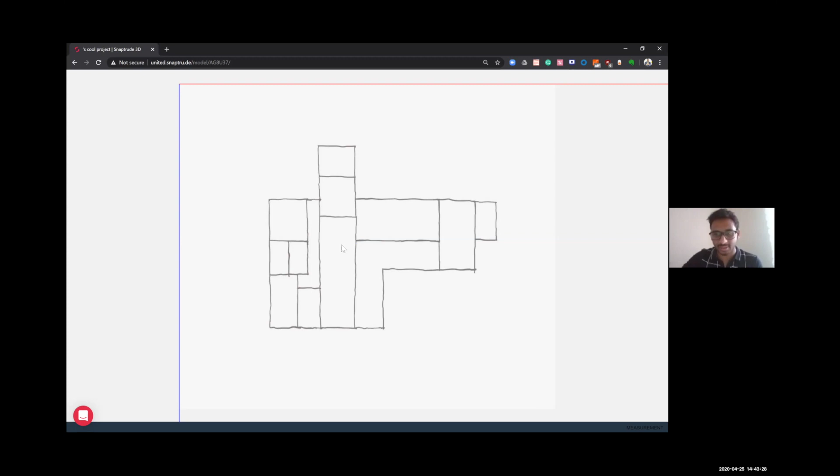And Snaptrude is not just ideal for homes, it's also ideal for master planning, site feasibility analysis, even school projects, hospital projects, etc. So once I've set the scale of the drawing, the next thing is just start generating the drawing out of it.

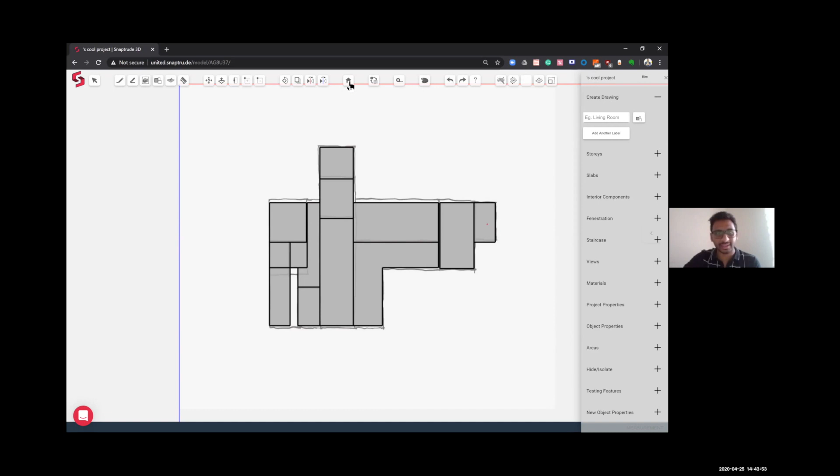But this is just in 2D. It's already 3D, just show the 3D view. It's already 3D. I can go back to the 2D view at any given point of time. And it's a lot more intelligent as well.

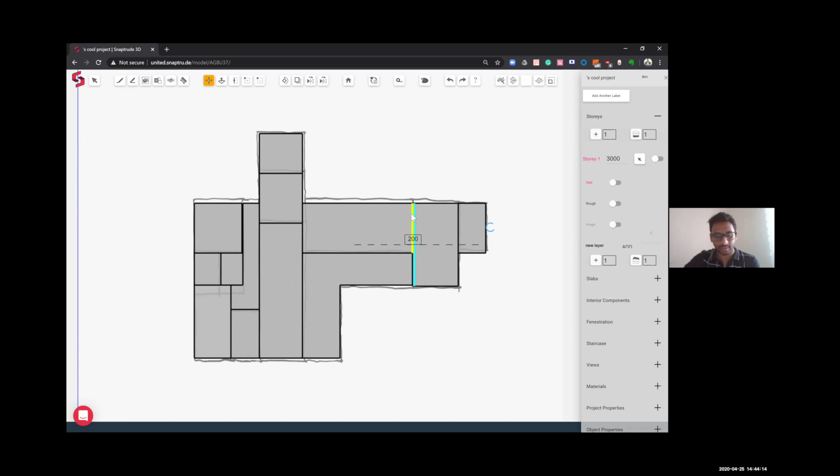So I'll just show it to you. If you want, you can actually edit out the drawings in 2D as well as in 3D. Everything snaps similar to any of the existing 2D tools or 3D tools. You can just quickly adjust the dimension.

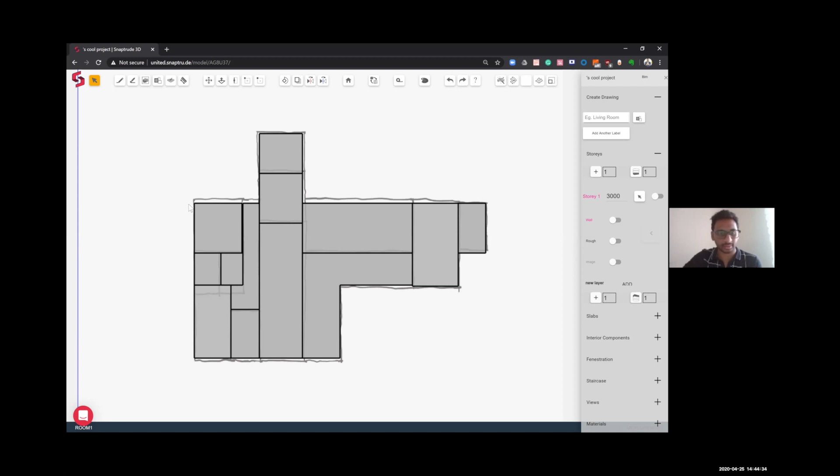Yes, yes, you can do that. Wow. And, continue. Sorry, on top of that, it's actually intelligent as well. I'll just go back and do a few more edits over here.

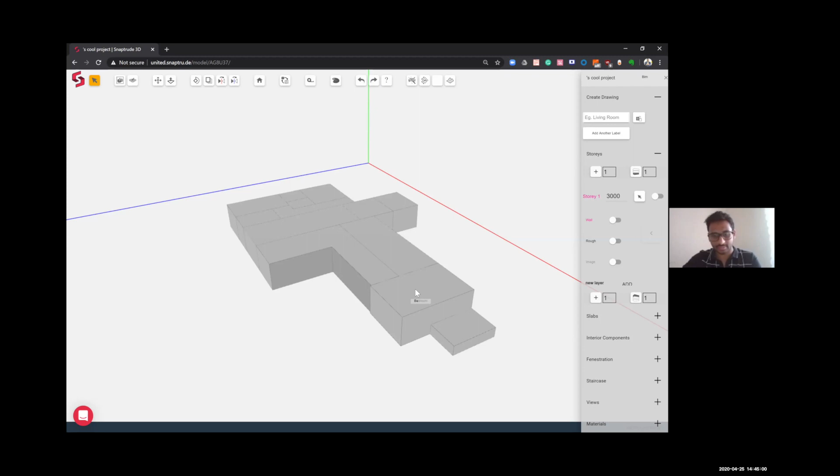If I go back to 3D, I'll show you, I can start labeling things. So maybe this is my living room, and I'll call this a balcony. The moment I said it's a balcony, it took the intelligent decision of making it 1 meter high. I can call this my bedroom, maybe this is my dining space, and I'll call this a kitchen.

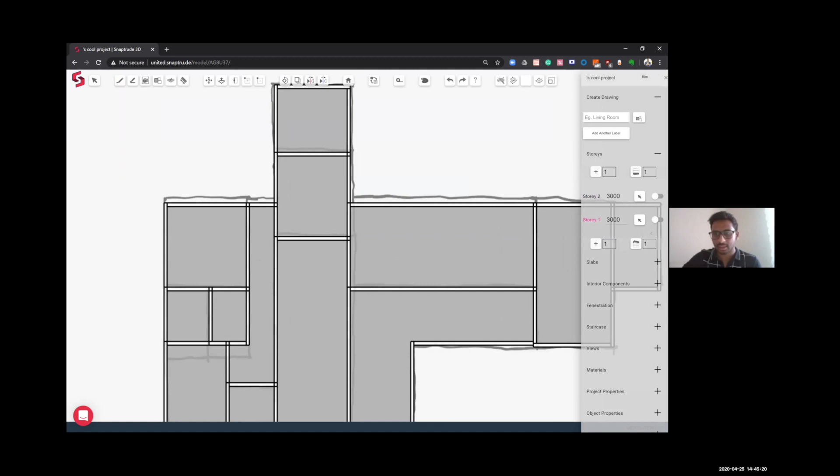If you want to generate a floor plan or a BIM model, what is there in the industry, you just have to do this one click, and you'll be able to generate a double-line floor plan out of it. Let me hide the image underneath to show you how it looks. So a full double-line drawing is generated in the floor plan, and in 3D it's a model with a master slab which is parametric. You can adjust the overhangs however you want, and internally all the walls and the floor, everything is generated.

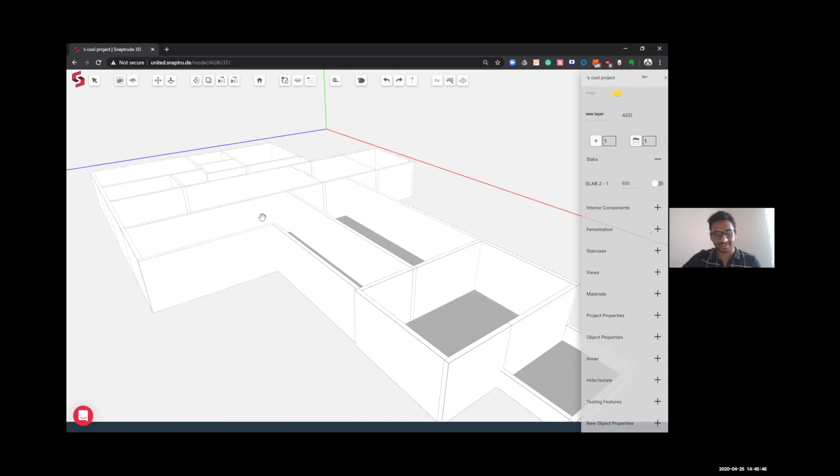This is incredibly fast. For those who don't know, if you've seen architects and interior designers work, going from a sketch to something like this would take 4-5 hours. It's absolutely crazy.

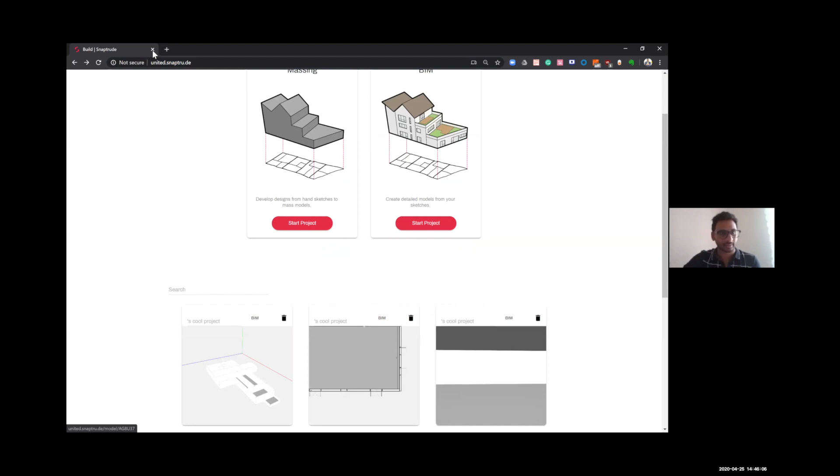And how far can you design and take it forward from here? Yes, I'll show it. I just inadvertently pressed the back button on the mouse.

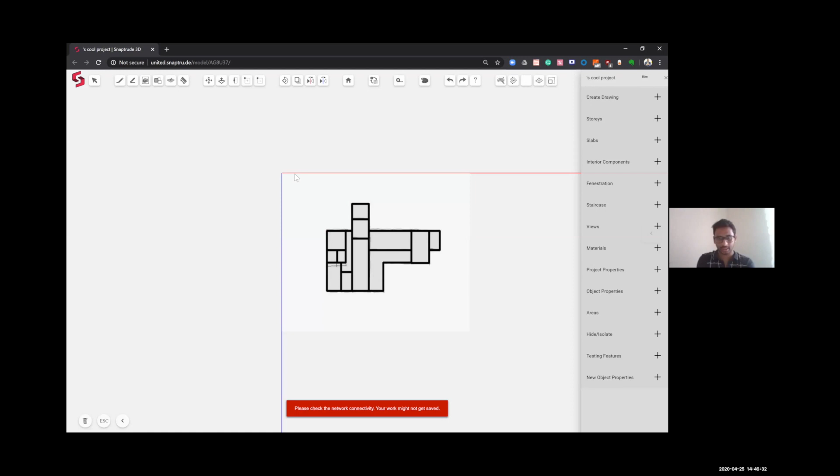No problem, I'll resume. So, quickly trying to understand, this particular tool you have designed keeping whom in mind? The primary audience we look at is, of course, architects and interior designers. Those are our main audience, and we've tried to make their life as easy as possible.

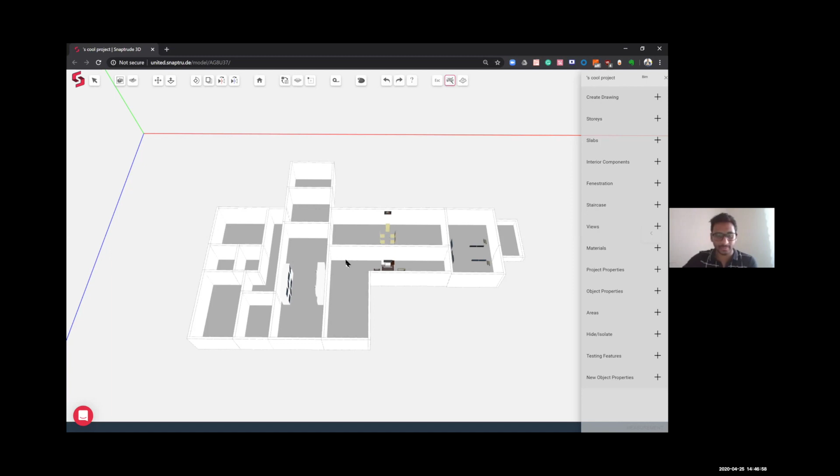A few more features in terms of automation: along with this 3D model, a floor plan also gets generated, which is extremely essential for an architect. With tools like Auto Interiors, since I was able to label what my living room, bedroom, and kitchen are, you'll see it gets interior designed as well, ready for presentations, and it'll tell you if the space is appropriate while you're designing.

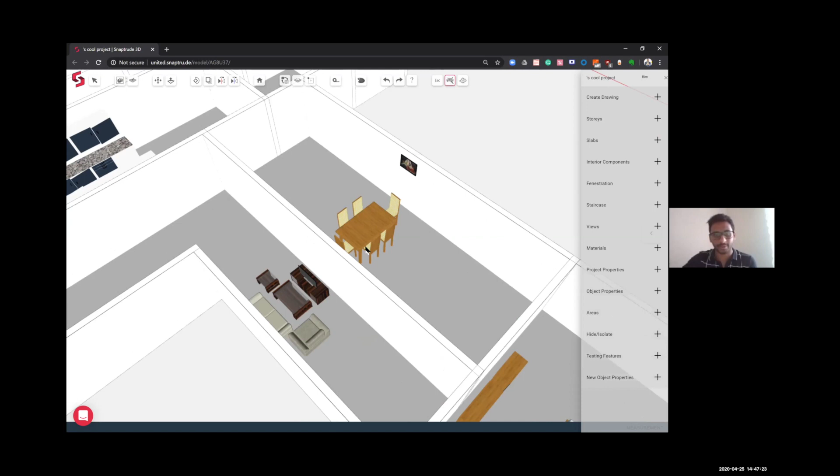Is your bedroom big enough to have a kid's bed? Is there enough space to walk? Here, the living room is so crammed up you cannot actually walk, so you get to know the living room has to be bigger and something else has to be compromised. These kinds of decisions can happen because of these quick automations possible in Snaptrude.

Plus, while I'm doing it, it also gives you a sense of the bill of quantities: the amount of brick going into the walls, the plaster, the paint, the waterproofing needed for the roof, the furniture components, and various other things are documented which you can get out. This is an incredible level of automation.

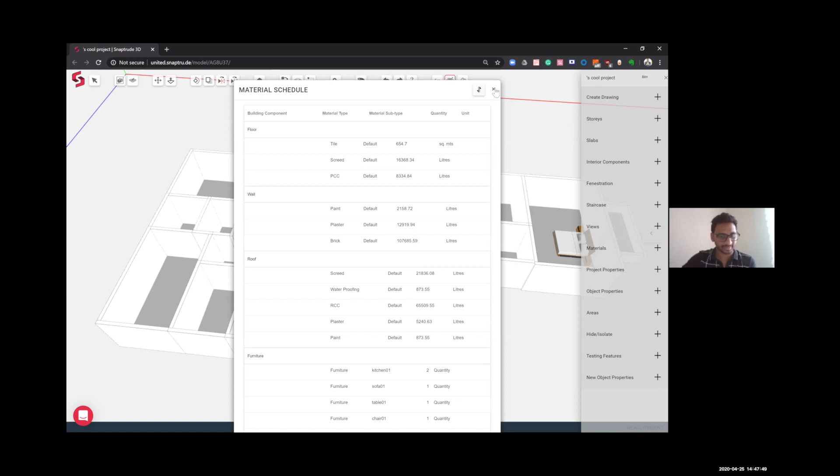You're talking about hours and hours and hours of work. Yes, exactly, and architects should not be doing that. It should be this way naturally, is what I feel. I don't know why it was never this way. Maybe it makes sense - architects are supposed to be the creative ones, not sitting and making BOQs.

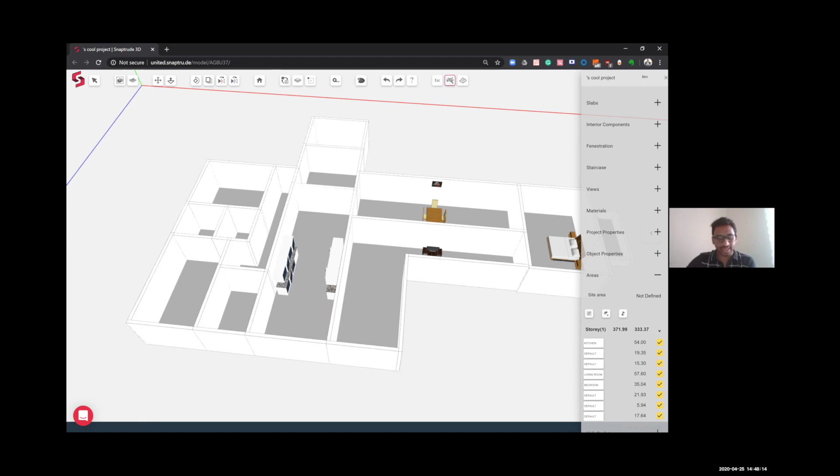Exactly. And your areas also get generated on the right side, as I'm showing you - it'll tell you the built-up area and the carpet area, and how the distribution looks like for living room, kitchen, and so on. So if you're not doing a small residential project like this one, you can do a huge site plan, say a 50-acre site with 6-7 towers, and you want to know in every tower how much area a 3BHK or 2BHK is taking. You'll be able to get all this documented information at one click, even doing a project as large as that.

That's absolutely incredible. You're talking about a combination of software like AutoCAD, Autodesk's BIM 360, SketchUp, ArchiCAD, and even Excel. That's crazy.

And up to what level of complexity do you have - do you have any project which you have done completely on this? If you can show us an extremely complex project leveraged using Snaptrude? Yes, I can show you a few screenshots of the public projects we have done - we cannot share the ones done by our users, of course, but I'll show the public ones.

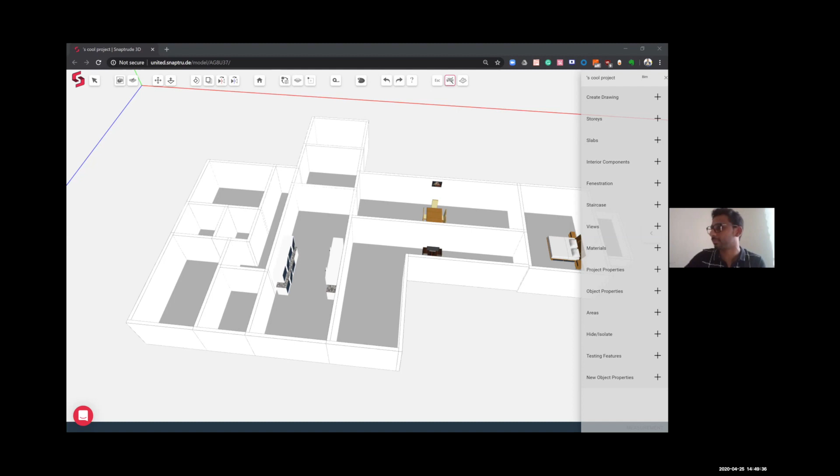I want to understand one more thing. So a lot of things which you're showing me, do they intelligently check for stuff like bylaws, or physics and things like that? Are these actually executable plans?

Yes, so we do not actually go into the physics or the bylaws nitty-gritties. The reason being, since we are a global product, we don't want to be keeping tabs on every bylaw and the changes in bylaws across all the geographies. However, we will give you enough data so the last mile decision making can be done by the architect, because the architects understand the bylaws way better than any other person, and that's why they deserve what they earn in the market. We will give them as much data as possible so that they can take these decisions faster. That's how we deal with it.

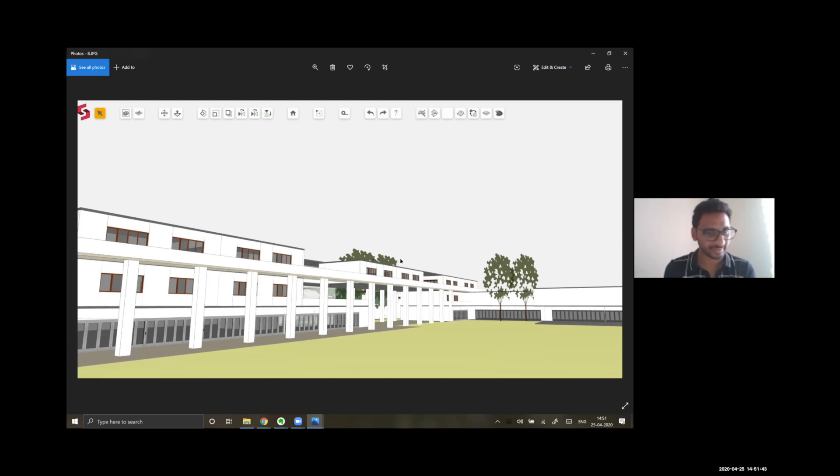And if I may ask, is there any completed building which was done leveraging just Snaptrude? It's a little too early for us to get that. We've seen a lot of people doing projects, but we don't really see those things because they're all confidential in nature. Once they're done, of course they'll reach out to us and probably we can ask for case studies out of it.

Absolutely. This is incredible. I mean, this is very, very quick. I did not think it would be that fast. And you're talking about complete automation of a lot of simple tasks which people have to spend their time on. But yeah, this is absolutely incredible.

Correct, this is a fairly large scale model of a school project which was done on Snaptrude, with multiple floors and all that. Yes, it has, I guess, 3 floors spread across.

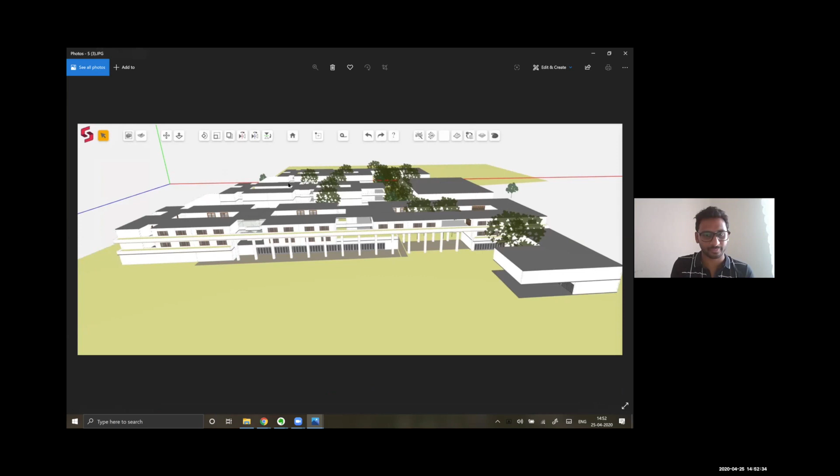Superb, absolutely superb. And of course, from this you generated the AutoCAD drawings and the bill of materials and everything? Yes, definitely, along with the schedule of everything. All the details are needed. So this is Snaptrude, and I must say it's a very interesting software. Thank you so much.

So moving on to my next question. You've just shown us the product and explained the thought process behind building it. According to you, what were some of the product innovations you were able to bring in which did not exist before? Especially because this space is occupied by some juggernauts like Google SketchUp—I think Google no longer owns SketchUp, it's Trimble now—and still, Trimble is a fairly big company. You're talking about Autodesk, a juggernaut, and Rhino, very old, big companies. So what were some of these innovations which these companies didn't do, which you focused on and were able to deliver?

Yeah, so the main thing we concentrate on—you'd have to appreciate all the tools in the market, including AutoCAD and SketchUp, because they were built in an era where digitization wasn't there. Like, 3D modeling was a new thing when SketchUp came in, drafting was not a thing when AutoCAD came in. But the thing is, why do we still use those age-old technologies? That has been the biggest problem with the industry. So for a new generation, a new set of tools are needed if you have to become much more efficient and productive. Snaptrude focused just on that while building these key innovations.

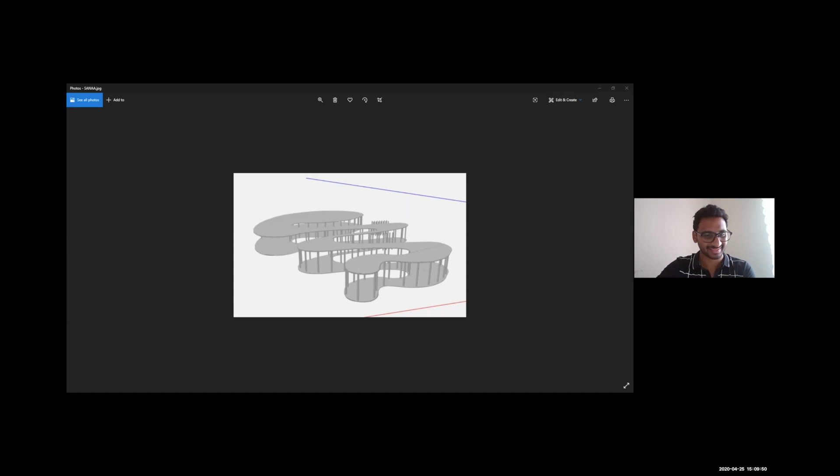Oh wow, this was generated in Snaptrude. Yes, yes, this is the SANAA Pavilion, the famous SANAA Pavilion in Japan. We tried implementing whatever internal version we have on this. This is incredible, very beautiful. Thank you so much. If you're able to do this, you've already eclipsed SketchUp. Yeah, definitely, we have been able to eclipse SketchUp for a while now.

I want to ask another question - apart from the actual modeling, have you guys also thought of getting into stuff like rendering? So right now, what we do is export to all the major rendering tools out there, including Lumion, etc., using standard file formats. But we were considering partnering with an existing cloud rendering tool. We haven't done anything as of now, but it's there in our pipeline.

So we don't want to be building a render engine because there are so many beautiful rendering engines out there. It's just better to create a seamless pipeline so you're able to get the desired outputs. Wonderful, this is quite interesting.

My next question is also related to interiors. What about the furniture libraries? The biggest decision we took early on is that the library is expandable by the users. We can bring in any OBJ, Sketchup file, 3ds Max file, any standard format. Once you add it, it's going to be there forever.

Wow, that's incredible, that's how we started. Okay, that's really nice. I should connect you to one of our previous interviewees, Fans Art, Tarun, who makes beautiful designer fans, and I'm sure he would love to integrate that library with you. Definitely would be happy to. Thank you so much, yeah, it's absolutely incredible.